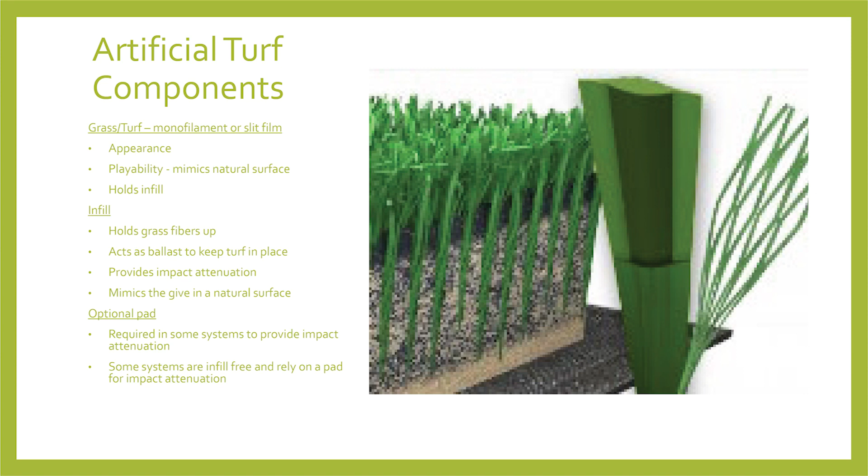So, sustainability. The grass and turf, that shag carpet that I discussed on the previous slide, that product has about a 10-year life expectancy. That product is fully recyclable.

In fact, as of 2022, there is a facility in Texas that is actually recycling - it did go through a process of recycling that material. There's also a company in Europe, Rematch, that has been working on this for several years and has several plants that has been doing recycling of the actual turf products, the grass, the backing, and everything.

The infill would actually last longer, but it needs to be removed as part of the replacement process involved in the grass, and so that is removed during the turf replacement at around 10 years. All the infills we've explored can be sent to a plant for separating and cleaning, and then reused in new production cycles going forward.

So that part of the process is completely recyclable. Now the optional pad, depending on what it is and what it's comprised of, has varying degrees of recyclability, again dependent upon the different products. We'll talk more about the different products and options we're exploring in future slides.

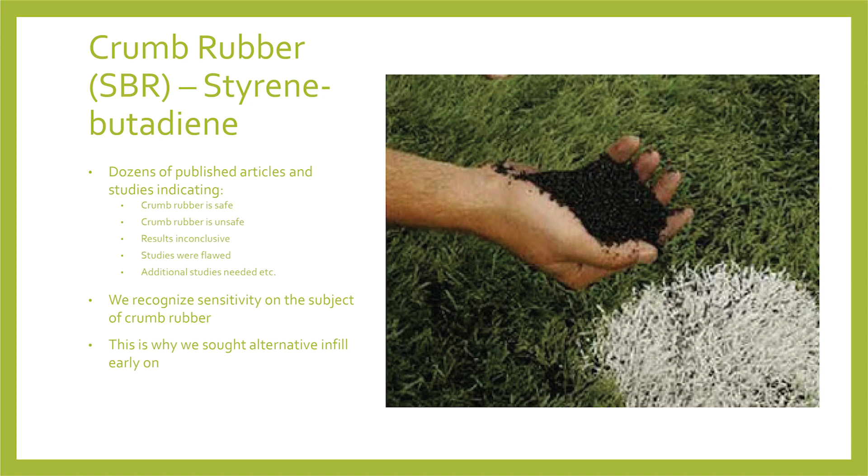With that, we did feel it was important to start off by taking a look at standard crumb rubber. It's important to understand this is still the industry standard, used in 9 out of 10 installations. It is recycled tires that are cryogenically frozen and then shattered. This system does not require a pad underlayment, and it is considered the optimal system for safe and consistent play. The products within the system are sourced in the U.S. and it costs about $6 a square foot.

Again, I want to take a moment to talk about the system here. This would be sand - there's a mixture of sand and rubber. The top layer of rubber is primarily where players would come in contact, the rest of this is all buried by this top layer. So the primary point of contact is what's up here in this top layer, just underneath the bit of the grass blades that protrude up to the top.

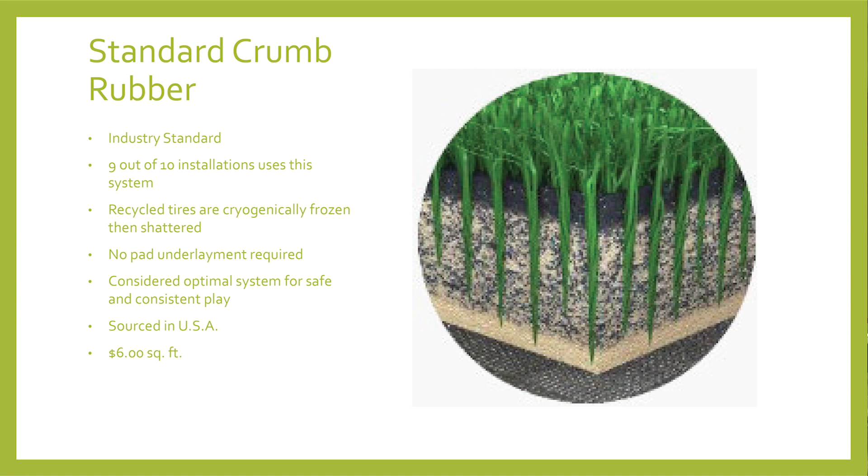In this second option, we again are looking at crumb rubber - same system, still uses crumb rubber. We're still looking at the sand and sanded rubber for the ballast and the infill mix. But this time, instead of topping it with that top layer of crumb rubber, we're proposing we could use a Cool Play top layer. Now, Cool Play is a thermoplastic elastomer - it's a much different plastic, not the recycled tires. It's a plastic that is used in children's toys.

It's much more recyclable. It also has some minerals that have cooling properties, which is why it's got the name Cool Play. It's primarily developed and used outdoors, but it can be used indoors. The purpose is to lower the ambient temperature of the field turf, but it works perfectly fine indoors too. With this system, because there's still crumb rubber within the infill, there is no need for an underlaying pad. This has no change in playability compared to the crumb rubber system because of the granules and the way Cool Play interacts on top. This Cool Play product is also sourced in the USA, and it adds about 50 cents a square foot.

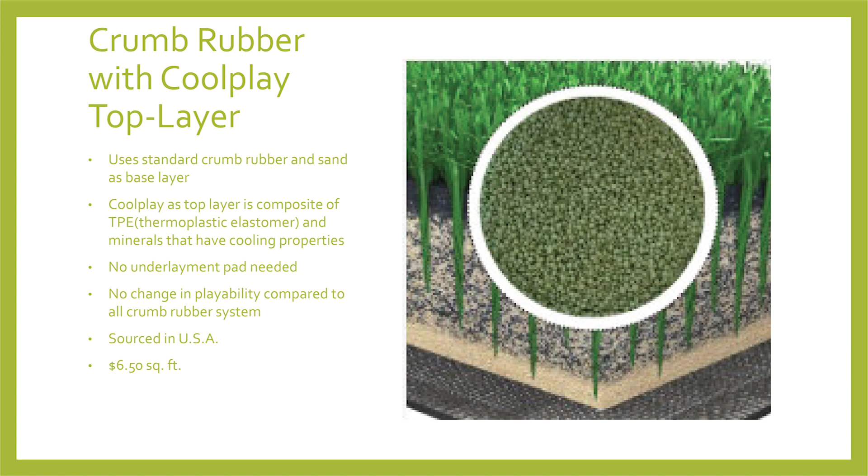Now, the next few options are going to require an underlayment pad, so I thought it'd be important to take a minute and talk about that and how it works in the system. Two of the options we're considering or looking at right now, and have been priced out for underlayment pads, are the Thermagreen or a Brock pad. They're similar, they both act in the same way, they both go underneath the systems we're going to describe, and they both serve the purpose of providing shock absorption and impact attenuation for the infill systems.

The Thermagreen pads are made of post-industrial polyethylene. This product material cannot be recycled, so basically we're saving it from going to a landfill for the next 20 or so years. Whereas these Brock pads are made of expanded polypropylene - this product is recyclable at the end of its useful life, which is about 25 years. So it's a different perspective, where we know that at the end of life we have a different option for it - we can recycle it and give it a new life afterwards.

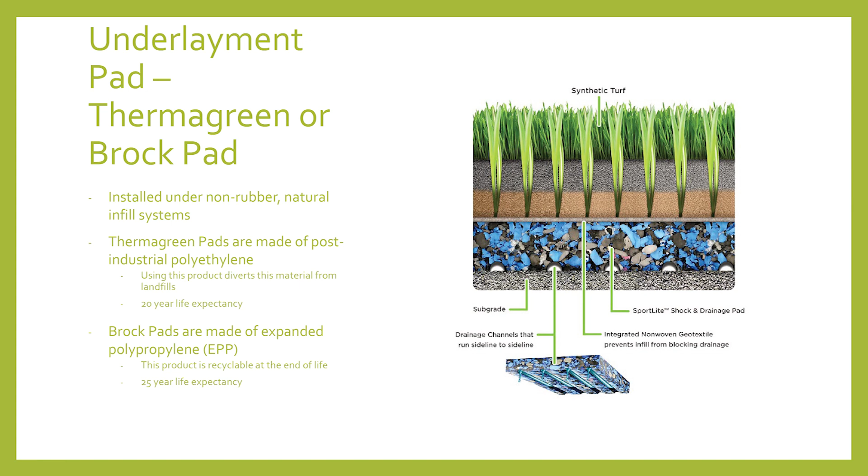So we're going to move on to a few different options. Pure Select olive core with Cool Play as a top layer. In this installation, we would still have sand and olive cores now, granulated olive cores, which is the Pure Select. We've got a natural system working here as the ballast, and this is also helping us keep up with the grass blades we're talking about. On the top layer, we're anticipating using the Cool Play, which is that TPE.

It's a different type of material than the crumb rubber, but still has that same playability. Again, because the system doesn't contain crumb rubber, it doesn't have the shock absorption, so it would require us to put down one of those two pads underneath it, which was previously discussed.

This product is also sourced in the USA and comes at a cost of about $8.50 a square foot. The added cost comes from the cost of the underlayment pad primarily.

This product is being used by Schaumburg Park District at Olympic fields and their outdoor fields. They began 4 years ago replacing their outdoor fields and have been replacing them year after year. They'll complete that transition this year. Following up with them, even just as of this morning, they have no reported complaints or concerns with using the system, like abrasions or difficulty of play or anything like that.

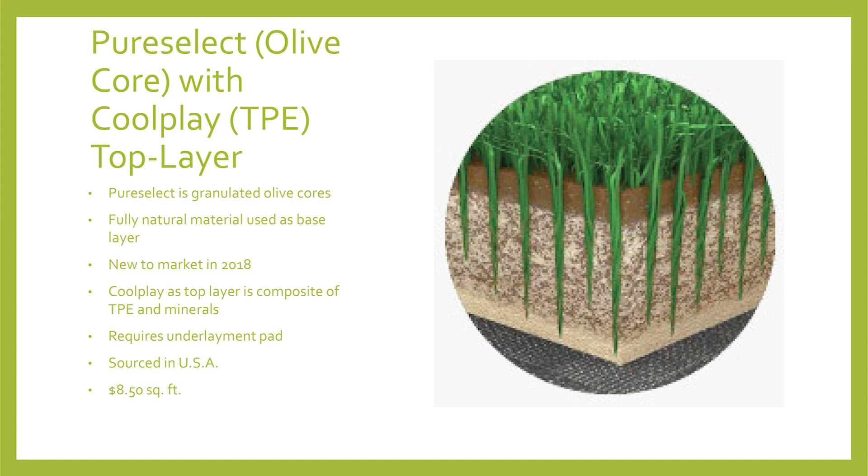The next option is Pure Select, again the olive cores with now True Blend top layer. True Blend is very similar to the Cool Play, but instead of being infused with those minerals to cool it down, they infuse it with cork. It's still that same TPE, the same plastic used in children's toys, but it's infused with cork instead.

While this picture doesn't describe it as well as some of the past pictures, it still would have a base layer shock pad. We would have a mixture of sand and olive cores throughout, and then a top layer of this True Blend. True Blend is not sourced in the USA, but it does come at also approximately $8.50 a square foot.

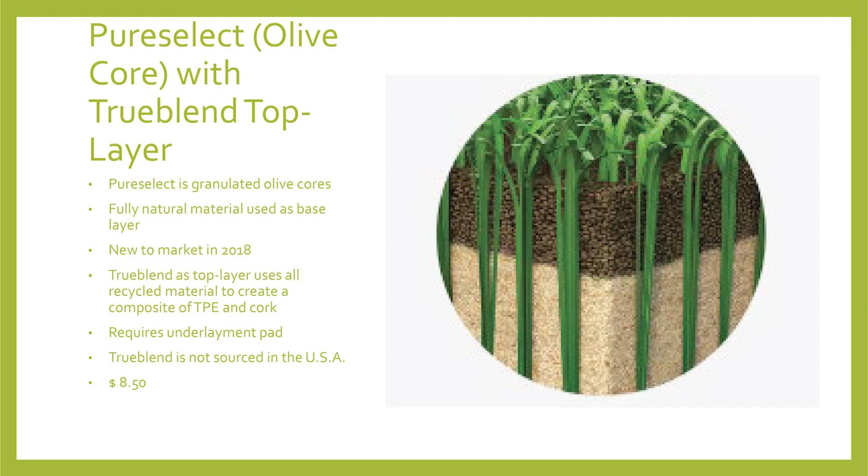Brockfill is a newer item on the market. It's actually a highly engineered wood particle that's made from southern pine. In this scenario, this is a third-party vendor that provides just infill. They do make one of the pads that I mentioned, the Brock pad. They also make this Brockfill. It was new to the market in 2019. It has not been utilized in a lot of places.

It does have the wood chips or wood particles throughout the entire system, so you would be interacting with the wood fibers on the top layer. Obviously, it's a fully natural material throughout, and it does require a Brock pad underlayment for shock absorption.

This product does void the warranty with some turf companies due to being a third-party infill. It is sourced in the USA, which is at least helpful from an environmental standpoint. However, in talking with the local sales rep, he does not recommend this product for indoor application because it does have some dust issues, and due to its weight, when it doesn't have any moisture to wick, it tends to migrate and gets a little light and flies around, with a little more of what they call splash when a ball or someone hits it. So the manufacturer does not recommend this for indoor application.

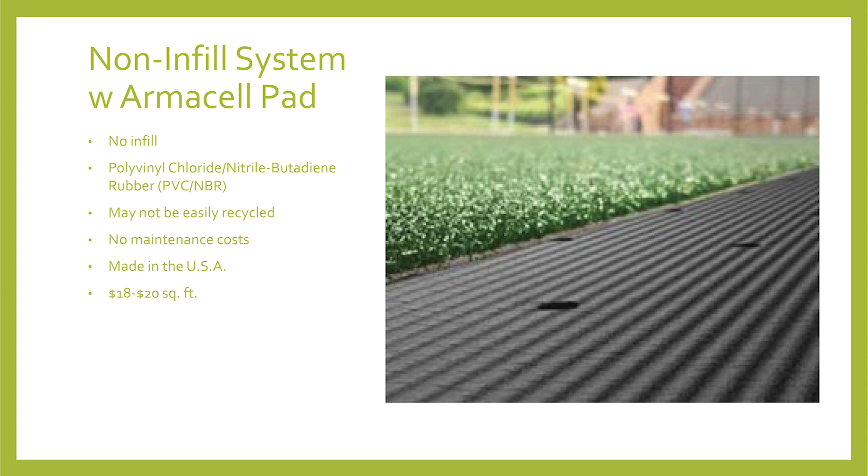So in summary, as a reminder, all of these systems have a life expectancy of approximately 10 years. That 10 years is driven primarily by the grass fibers in the system and the time it takes for those to break down and need to be replaced.

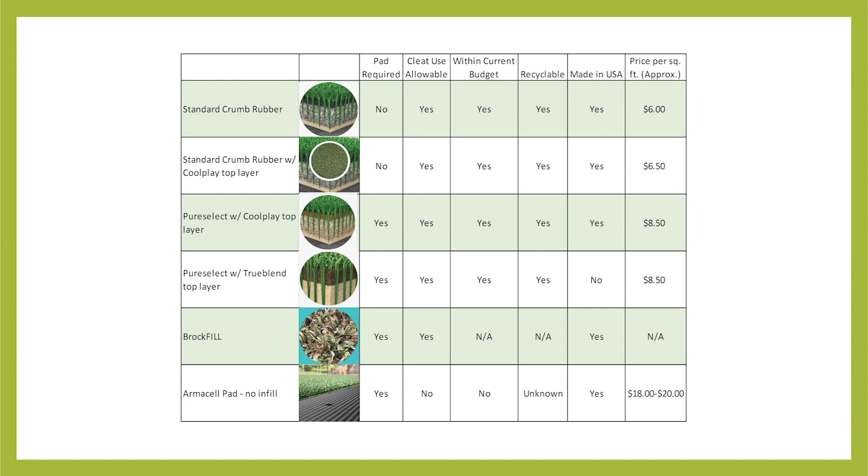Are there any other commissioner comments or questions? Can we get some input from the public? That's what I was thinking. I figured they would be next. Okay, great. Anybody from the public have any questions, comments, or concerns they'd like to share?

I apologize, we don't have a podium out that way. It's okay, I'll talk loudly, how about that? You had mentioned you had looked at Maine South - and can you please state your name? Oh sorry, my name is Peter Mirzwa, I live in Park Ridge. You had mentioned that you had investigated the turf at Maine South, and I'm assuming you're talking about the new stadium turf, yes? That's correct.

And what did you say that infill is? They used Pure Select olive core initially, completely, with nothing on top. So the top layer that the players were in contact with was olive cores. Recognizing that it was a bit abrasive, they made an effort to resolve that and remove some of that top layer, and then brought in that Trueblend on top, which is one of the options that I proposed, which was basically the Coolplay with the core instead.

What they did not do was make it a full, true, separated layer. They took out some of the material and top dressed with some of it to try to enhance what they did, but it was nowhere near how Schaumburg did it, where they layered the sand, layered the olive, and then put a true separation, here's just plastic.

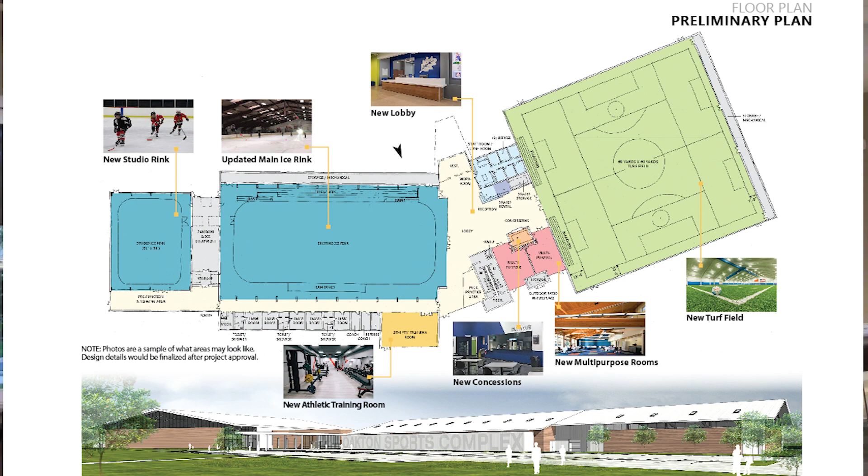So what we've ended up with, I threw this slide in here just to show you where some of our focus was at as we revisited the concept plan. Again, the plan is fairly small, but I just wanted to identify the plan on the top left was basically taking the sketched concept plan, putting it into digital software.

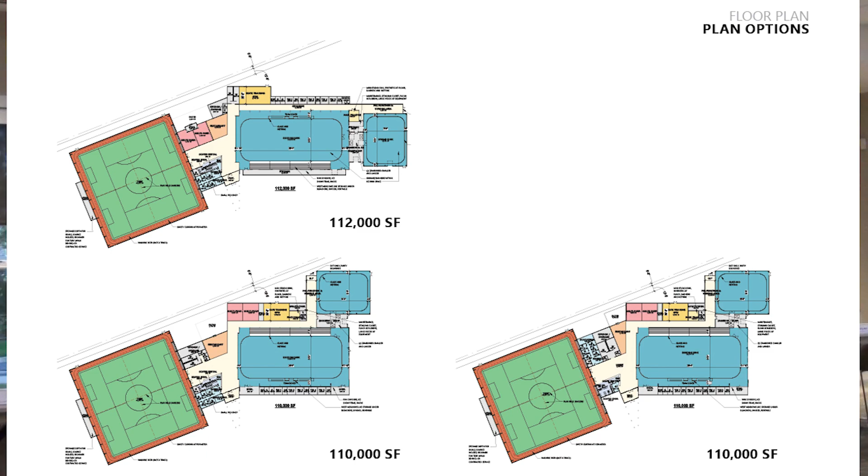The bottom left, the first thing we visited was a relocation of the studio rink. Part of that was driven by trying to provide a more efficient parking layout. If you go back to the original site plan, you can see just east of the existing arena and the proposed location of the studio rink, you've got an area of parking that's great. It provides maximum parking count for the site, but for security purposes, the intention is to only have the entry point on the west side.

There's really no convenient secondary entry, so anyone parking there on those particular days where there's significant crowds has to walk all the way around the building in a U shape, which is not the most convenient layout. So we considered moving the studio rink into that area between the existing ice arena and the railroad line, partly driven again by a more efficient parking layout.

The second issue we looked at was that with the location of the studio rink to the south, you create a fairly long corridor. Now, building a long corridor means you're increasing your square footage to get to all your function spaces, which is not the most convenient use of that square footage. Any additional square footage for the building is going to drive up your cost.

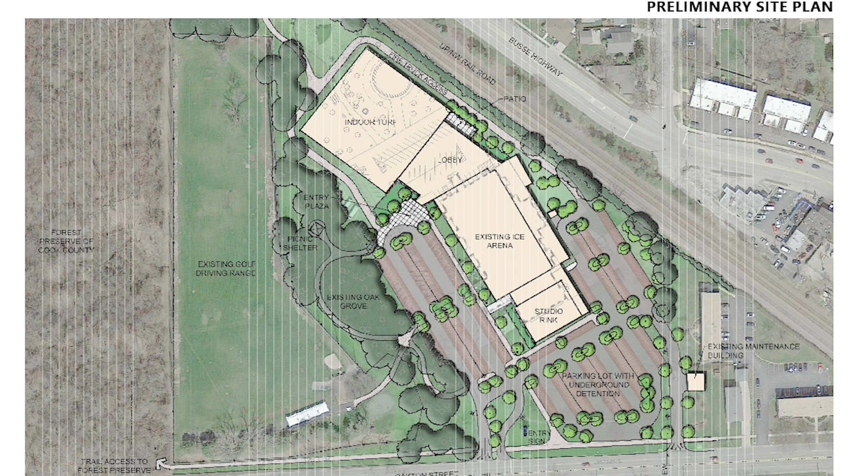So we tried to consolidate the space, in particular to the east. There's a space next to the rail line that wasn't really being utilized. It was sort of a dead space, for lack of a better term, not really having a reason or a function in that area. So as we got to the bottom right and tried to squeeze in some of the program space, move the studio rink, we were only getting a few thousand square feet out of the building.

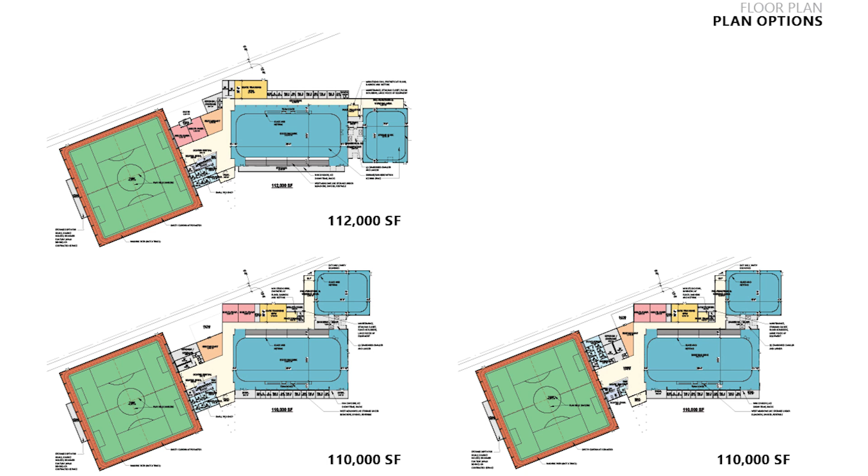So what we ended up with is this plan here. Now, we stuck with the color coding. This is oriented north to the left.

The largest changes with this plan: there's two items. Number one is the orientation of the field house. The reason we reoriented it is that if you look at the original plan, with its trapezoidal shape, it's not the most efficient use of that space. Coming in with a more orthogonal approach, there's a little more form and space and order to the layout.

The lobby space between the field house and the existing ice rink, we feel it's wide enough, at a 50-foot span, that it can handle the crowds, but that the use of that square footage is more valuable.

The other item on this plan, which would be new to the board, is we are proposing that we reuse the existing two-story building that currently functions for the ice arena to house the locker rooms as well as ice mechanical. The reason for this is partly driven by Wight and Company.

We have a heavy emphasis on sustainability. We have what's called a Wight Sustainability Standard, which we apply to every project we do, regardless of scale. These are cost-neutral items that increase efficiencies in lighting, HVAC, health and wellness, but also in repurposing and reusing existing space.

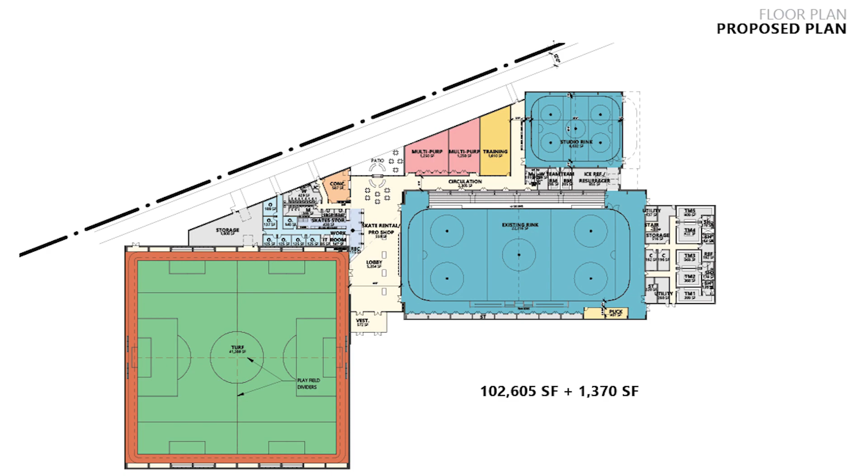Now you can see the backside of the building, we get a little bit away from this orthogonal plan, and that was just to try to maximize the available space in that area. Having a couple jogs in the building was better than having a number of tapered walls that was driving up the cost of the budget.

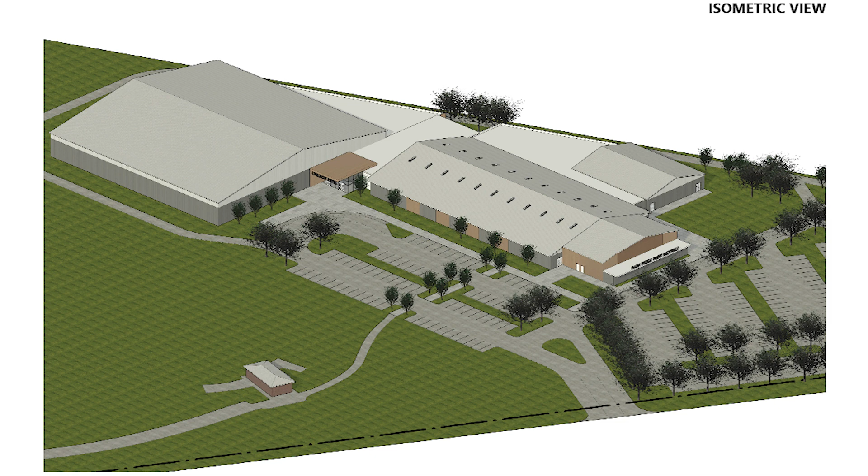And that is the last slide. So happy to field any comments or questions.

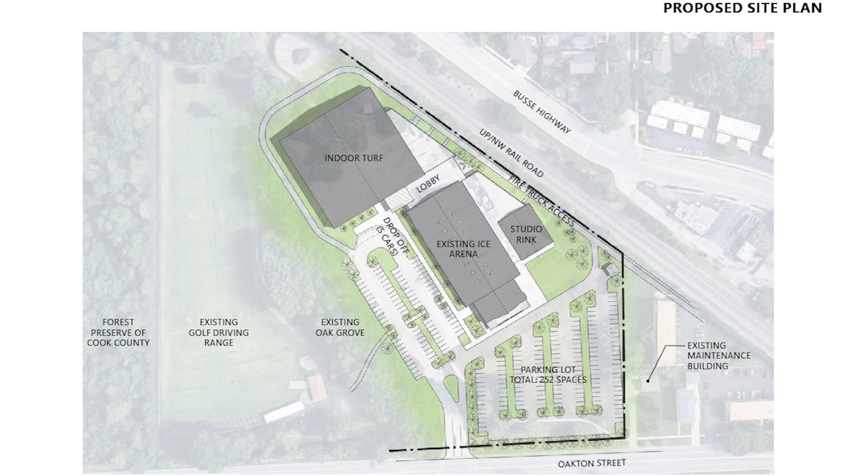One other thing I need to bring up: the permeable pavers are out of this plan, correct? So the three studies that our civil engineer did are testing a mix of percentages of permeable pavers to see where the bang for the buck is, because Park Ridge does not give you credit for permeable pavers when it comes to the design of the stormwater system, the underground storage. In all likelihood, the permeable pavers end up being an extra that doesn't help us with the storm.

Okay, but we've had discussions on that, and we've had aldermen willing to go to bat to change that, and we were told it didn't matter. So does it matter, or doesn't it matter?

If I can interject—so the next step for us is these conversations with not only Park Ridge but MWRD, to talk through what they will allow us to do, in the hopes that, in particular with permeable pavers, they would give us credit for that, at least partial. MWRD or the city? The city. Okay, MWRD allows it, the city does not.

Because we were told to take that off the table—it was no longer a problem, we had a different problem. So we need to be aware if that's a problem, because that can be fixed.

I think it was the timing we talked about. I think Terry said because our project got so big, there were other issues, and it wasn't the permeable paver. There's definitely a list of issues that the city has and a list of issues that MWRD has, and depending on where you're at on these two different points, they intersect and get from good to worse or better. It's kind of a weird situation.